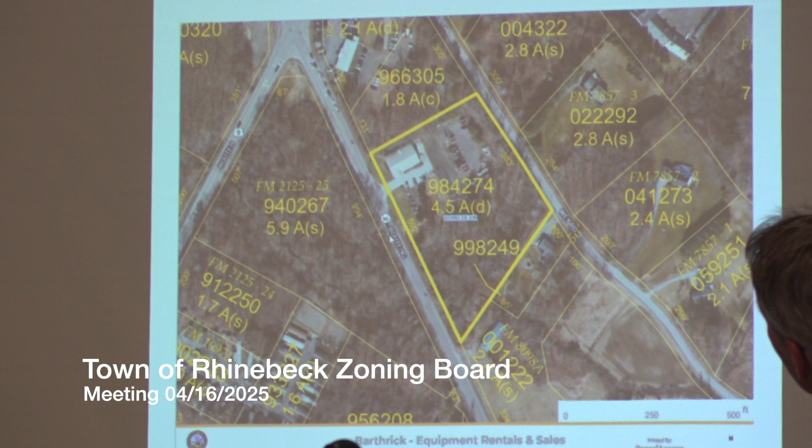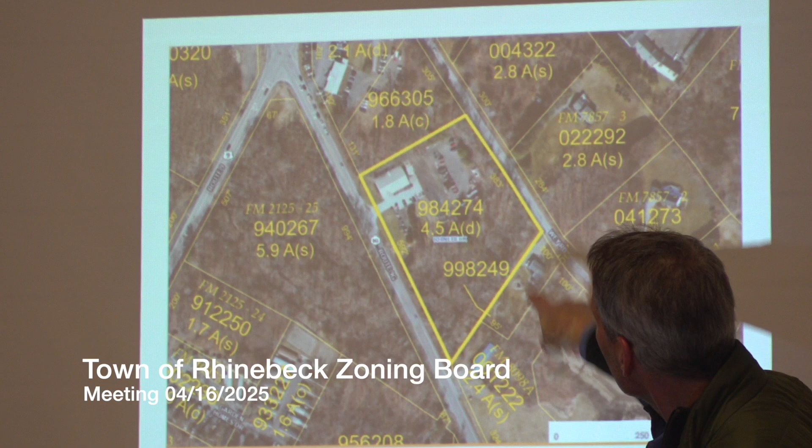I mean, yes, it is residential on this side of Wey Road, but there's a road between there and then the house is set back. Am I seeing that correctly? Yeah, there's a house, the big house, the log cabin structure, like up here, and that's residential. But it just seemed like it was adjacent to more commercial properties. But I mean, technically, it is across the road from these residences.

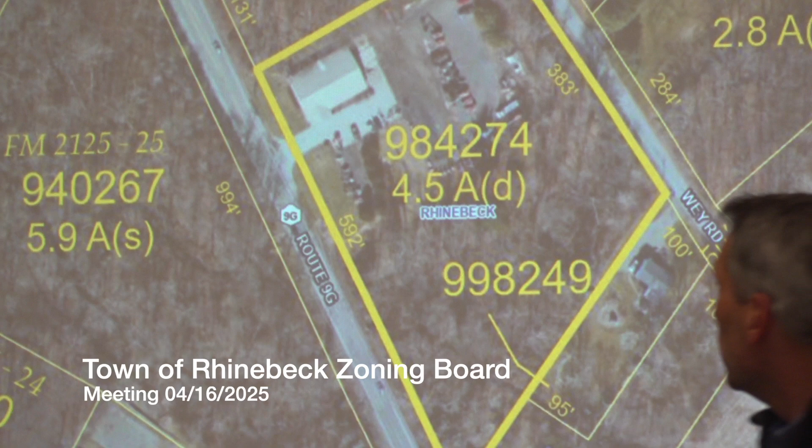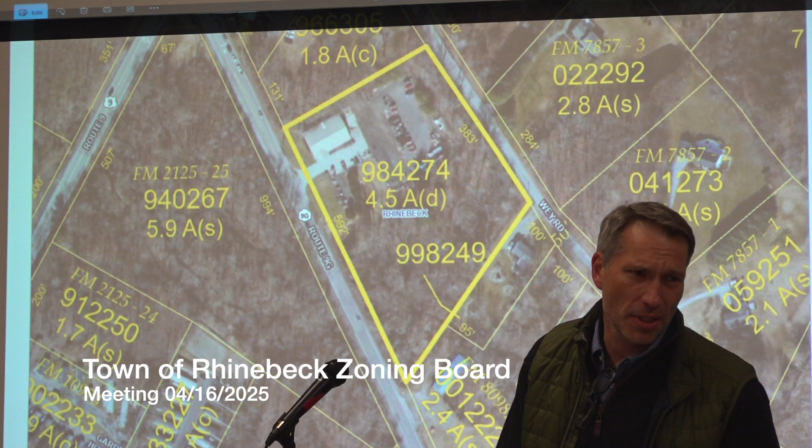So it's that's what I probably say - just on the border, it's the last residential property, and then I guess it's a commercial use that was built out on it. Maybe, I don't know, do you remember when the structure was put up? It had to be - well, we purchased in '04. Okay, but it was pre-existing.

The problem is with a use variance, they're very, very difficult to get. Extremely difficult. It's not like the area variance, which is a much easier thing to do. So this is kind of the plain Jane situation, we see the same thing, we need a bigger sign, yes you do.

We've given those variances to many folks along that corridor, so that wasn't a big deal. It was the fact that unfortunately it's a residential area, and I thought there was only a certain type of lighting allowed. I talked to Brian today, and he said his determination is that because it's a residential district, he reads the code as saying no illumination whatsoever.

So there's no flexibility, you need a use variance for that. That's the problem, the use variance is so difficult to get. With an area variance, there's a difference in the zoning law regarding physical dimensions, but if something's not allowed at all, that's when it becomes a use variance as opposed to an area variance.

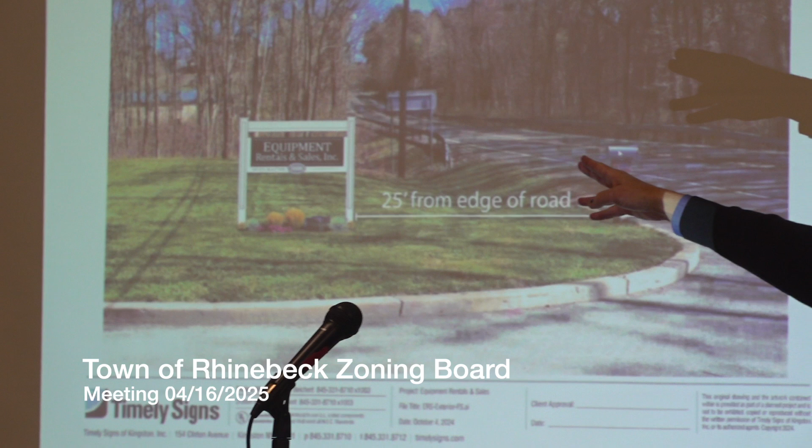I have another mock-up showing the sign on the site, right here. So this is the setback, 25 feet from the road. It's still below the tree line there, but it's got better views going south. We tried to move it up closer to the entrance to help people visually know where to turn in.

I'm sure there'll be some nice landscaping underneath, which is also a requirement. The renderings are nice, and that's usually a bugaboo, but that's exactly what we need. If we take the light fixture off, we have a 6-foot maximum height, so that would enable us to move the sign up, maybe just the caps could be 6 feet, a few inches lower than that. So it might help with the visibility even without the lighting. Then we can do the reflective paint too, it's a good suggestion, I hadn't thought about it.

So Kim, what are your thoughts, should we adjourn this to the next meeting, or do you want to accept it? I think we can accept it subject to the lighting question, you're going to check with your client. We can make a decision - if they decide to move forward with the lighting, we'll talk about a use variance, but if not, I don't think the plan's going to change much with or without the light. It'll actually look a little better if you take the light out, so I don't see an issue. I can have an answer for you probably tomorrow or Friday. That would be great.

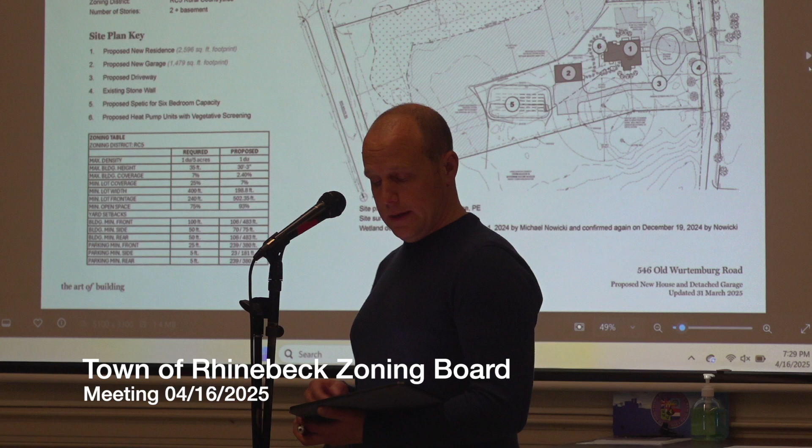But additionally, there's no existing or proposed driveway connection or approved break-in access point from 9G, which would require a permit, and we have no plan to do that. There's also an existing stone wall on Old Wurtemburg with an entrance already built into it, which we plan to use as our driveway entrance.

There's also a wetland that completely bisects the lot from north to south, really cutting off any access we could get from 9G, even if we were to propose that. That would require a specific permit, and also would not be advisable — we'd rather not build over a wetland to provide access when we have perfectly good access from Old Wurtemburg.

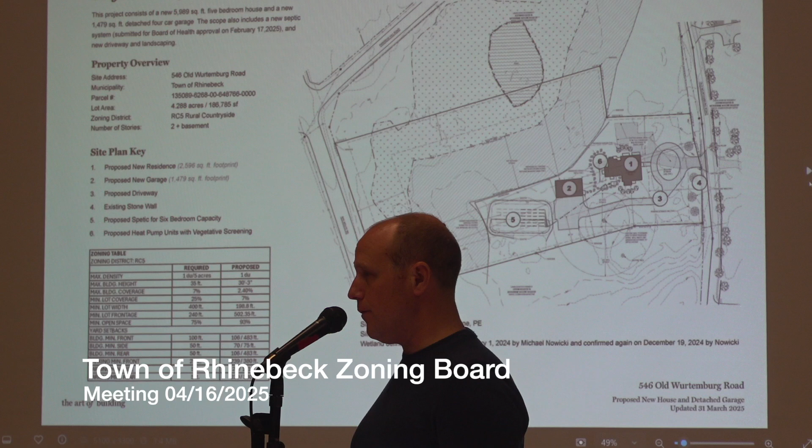The last item I want to bring up is again regarding the definition for fronting street, which there is none. Per code section 125-27 sub A sub 3, it states that except for agricultural structures, guest cottages, or caretakers' dwellings, no accessory structure shall project closer to the fronting street than the principal building, or be located within a required front yard.

Without a written definition for fronting street in the town's code, we would argue that in this case Old Wurtemburg would be the fronting street, and thus the proposed garage sits behind the new residence and adheres to all other zoning applicable. We'd also put forward that in any case of ambiguity in the code with no definition for fronting street, the burden should not necessarily lie on the owner to adhere to something not clearly defined, but rather fall back on the town to revise or clarify its code.

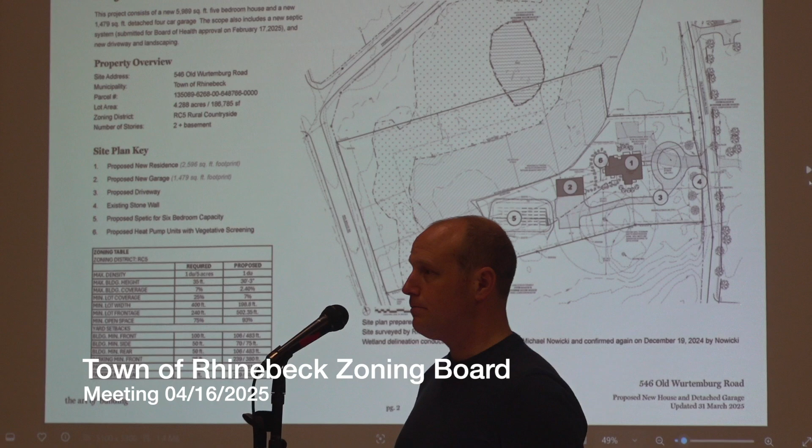Did you want to go through this briefly? I know you may have already mentioned it. Here's the pictures, and that shows what's important.

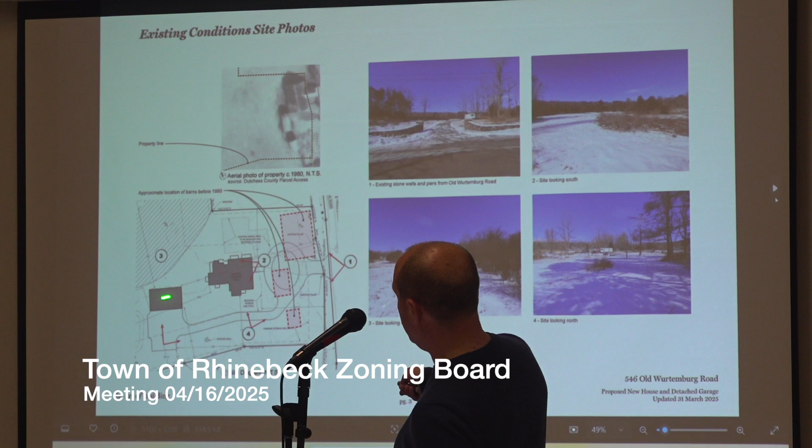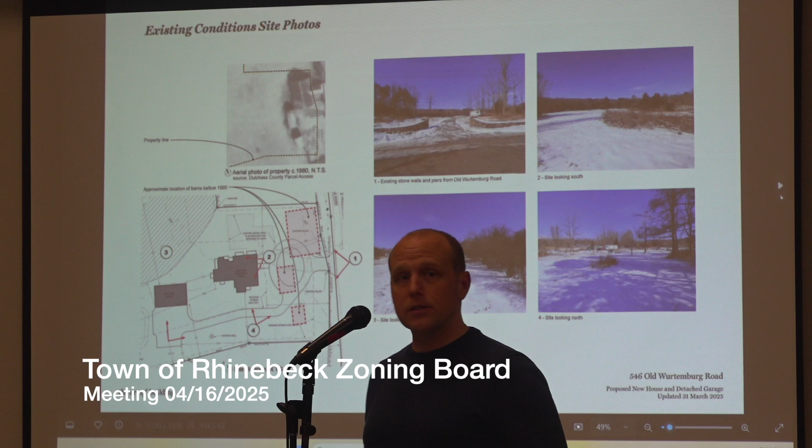Yes, so we were proposing a new single-family residence with its driveway entrance off of the existing stone wall, with driveway access to the back of the lot where the garage would be placed. We've placed the garage directly behind the house with its garage doors facing south, not addressing the street, making it clearly an accessory structure. The house faces east with its front door towards Old Wurtemburg. The dashed lines may not be relevant, but it's part of the old Marquardt farm, where some historic barns had originally been but were demolished long ago, sometime in the 80s.

As you can see, the break in the stone wall is where we propose our new driveway, which is where an existing opening already is.

Yeah, we actually passed by there, maybe January or February-ish. We were looking at a site farther down the street and happened to see that. Plus, you've been before us before for the other side of the street where you saved the barn and all that kind of stuff. You did a nice job there. The only thing I was going to ask, if this actually applied and we had to go forward, was...

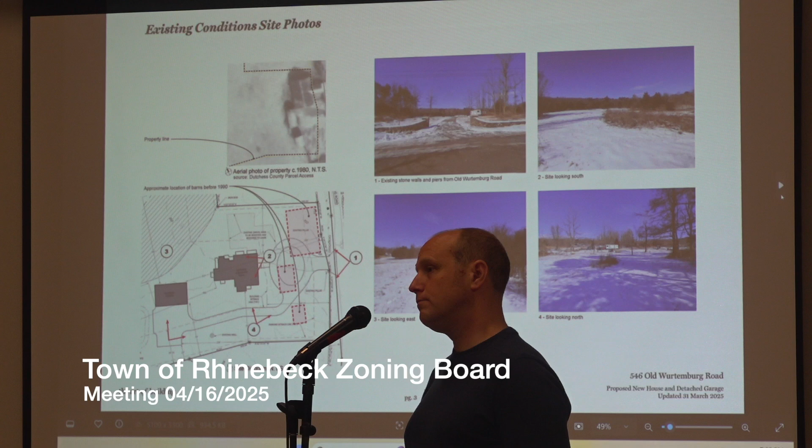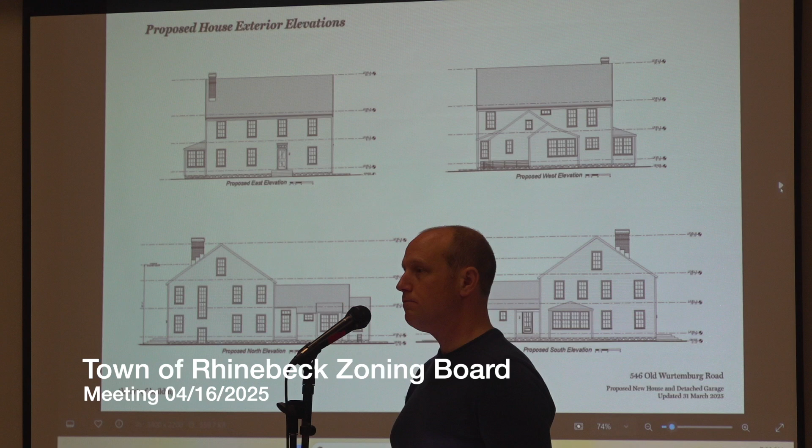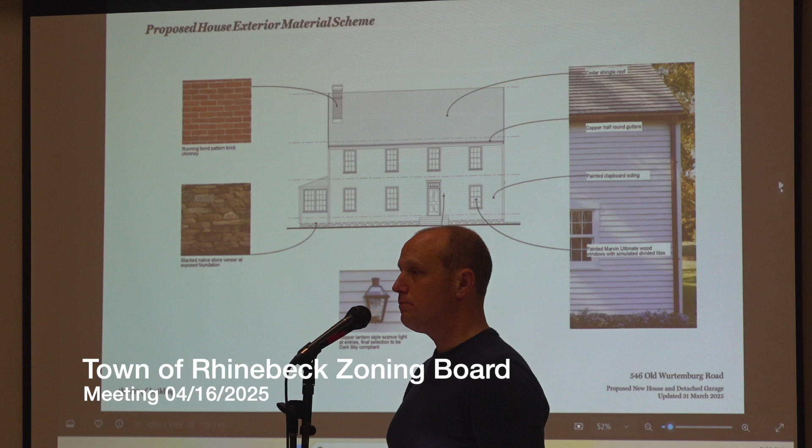To get renderings of the house and the other structures, in color, showing how they would appear on the property - their color, et cetera - situated as best you can. That's usually done pretty easily by folks in your profession, so it makes it a lot easier for us to see exactly what the structure is going to be and how it's going to sit on the property.

Absolutely. So I guess I would ask, if it's not too much trouble, to do that. I know we may or may not be going forward with a public hearing, because I think we need to get a determination on whether we need to go forward with this.

What would you want us to do? We may not be going forward because... well, no, I think we have to decide whether this even applies or not. So I guess, who would you want the determination from - Brian, or... well, you are the board, so you can make this determination.

I'd like to get more information from you - I know we just met yesterday. I can send you guys a memo. I think that's a good idea, sure, so we can decide amongst ourselves whether this even applies.

I don't understand - first, if you have two front yards, does that mean you don't have a backyard? Well, no, this has a front yard, definitely, and a backyard. So using my critical thinking skills, looking at that map, I don't see why we can't move forward on this.

Oh, we definitely can move forward. But is it necessary? Well, I think we have to do one of two things - either deal with the variance, assuming the section actually applies, or say the section doesn't apply and there's no need for it. So we're going to either grant or deny a variance, or do an interpretation, which I think, in my mind at least now, looks like an interpretation as to whether this even applies. Does that sound reasonable?

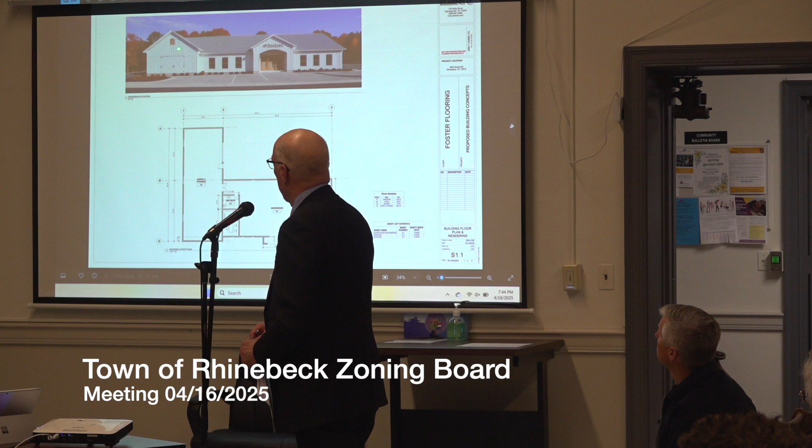We provided you with renderings of the building we're seeking to build there. That off to your left would be facing 9G. What you're looking at is facing route number... so this is the supply area, that's correct, it goes further out, and this is facing away from 9G. So the parking in the front would be for customers, and parking in the rear would be for employees.

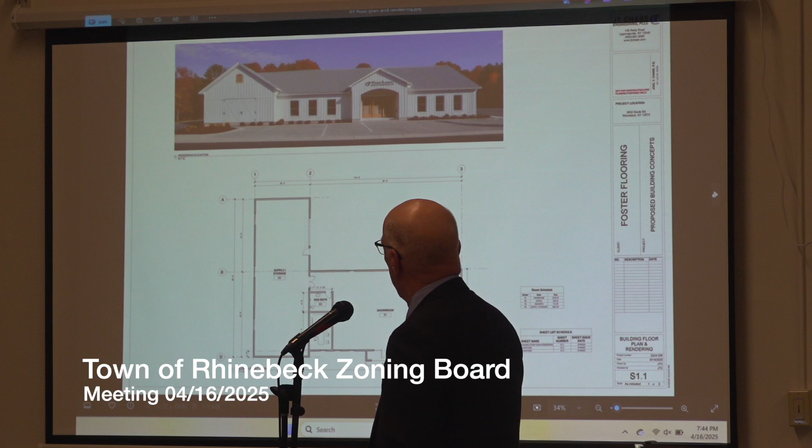Right now, in terms of the amount of people that go to the showroom, it's about 4 people a day - that's about the traffic level expected, four customers coming in per day. The people who install the flooring would also operate out of the building and park in the back. There's a separate parking area in the back.

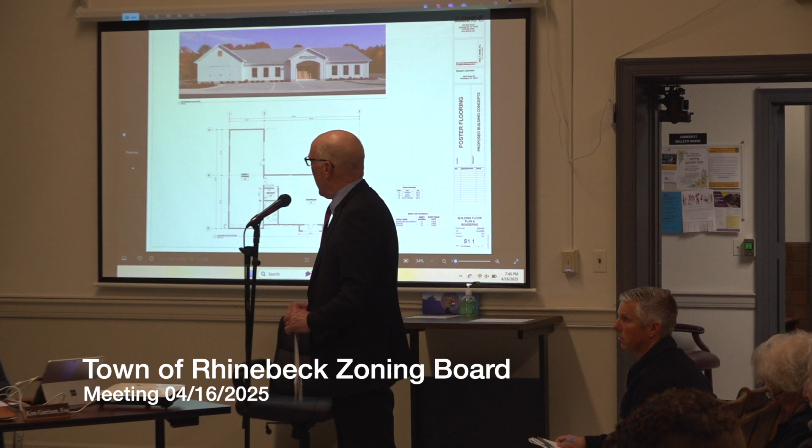So that's our application. The project engineer, Joel Chase, is with me here tonight, so if you have any technical questions, he's more able to answer them than I am. But that's generally what we're seeking to do.

I appreciate that rendering, but if it's possible, I'm sure it is, just have a rendering show the sides and the back, so we have the full picture. Sure. I think we all know the property well, but it's great to have the front - having the sides and back and how it appears on the site would be wonderful too, so we can get those renderings.

The only question I had was, does it have to be that close to the roadway? Is there a way to put it back or lessen the variance? Because one of the things we have to go through is whether there's a lesser variance we can grant to accomplish the same thing. It kind of looks from what we're looking at right now that maybe that's not possible, because a lot of times you do have things on site that preclude a lesser variance being granted.

So one of the constraints on the property is there are wetlands down towards Route 9 on that side, which limits how much you can move. So there's a small envelope that you can build in, maybe. Come on up, why don't you come up and introduce yourself? My name's Joel Chase, the project engineer.

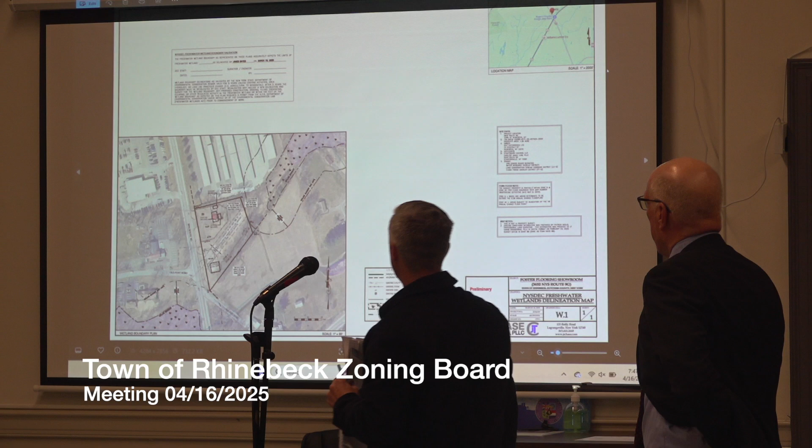We also have a utility easement that bisects the property, so we have to pick one side. And the northeastern part, we might have several feet of wetland adjacent area that we're ironing out with the DEC right now. That's what the questions were about, whether it's wetlands or maybe a septic issue. That's in the process of being revised right now too, because it's not validated or signed off by the DEC yet. That was based on discussion we had in the field. We're also trying to maintain the existing well.

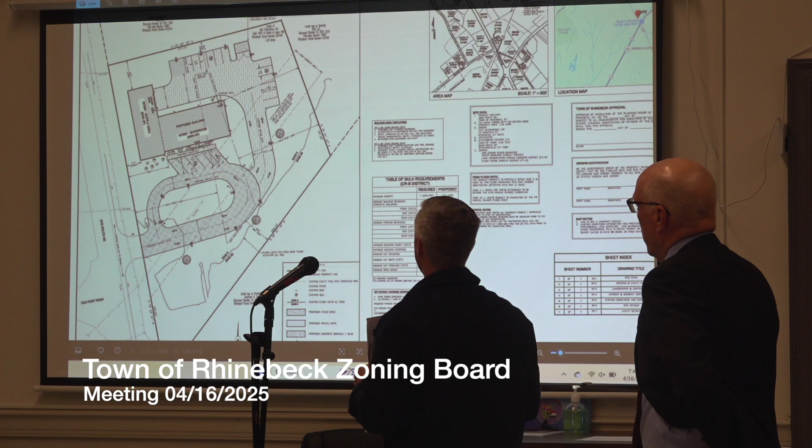If you see the site plan, the building envelope in general to where you would not need a variance is really tight. You can also see that it pretty much covers where the existing structures were on the property.

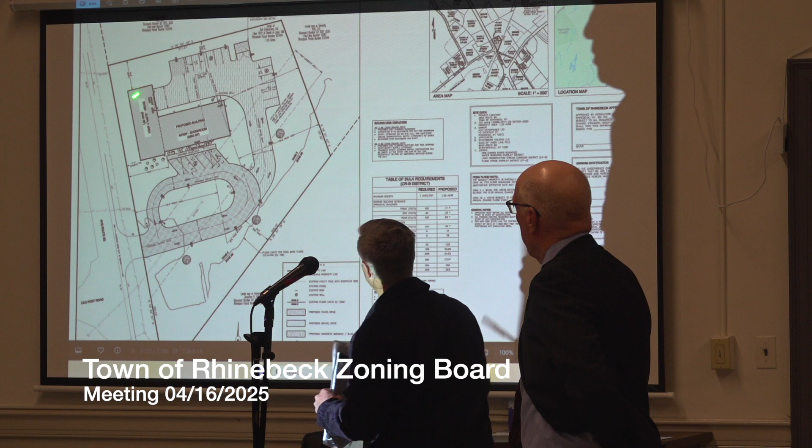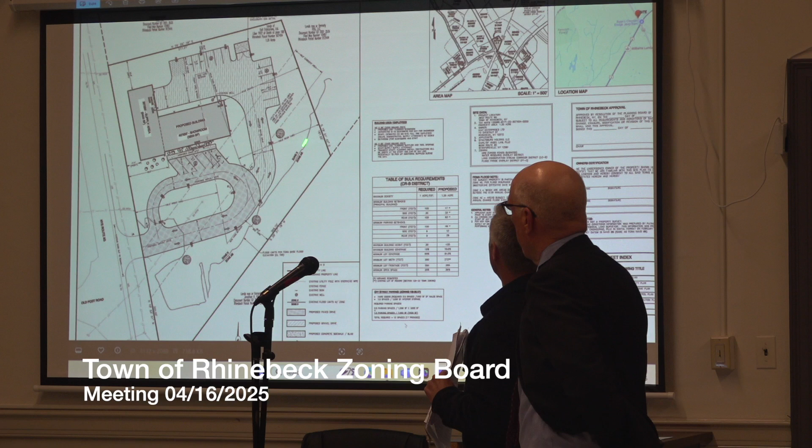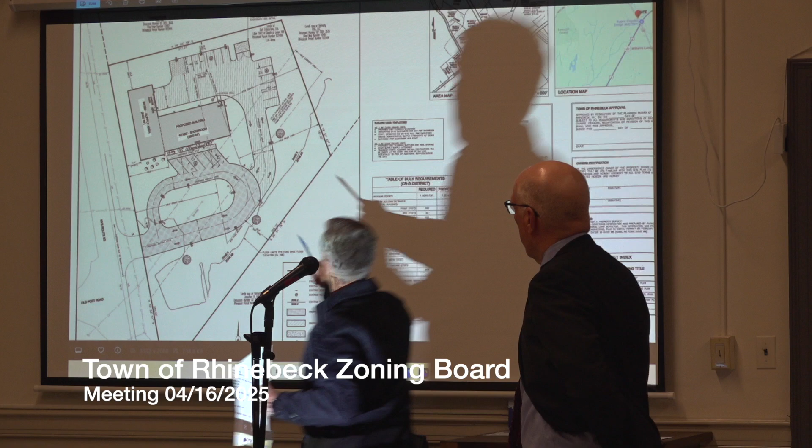This is the rear yard setback. Here's the front yard setback right here. And this is the rear yard setback, and here's your side yard setback. Where's the other yard setback? Up a little bit - oh I see, yeah, right at there.

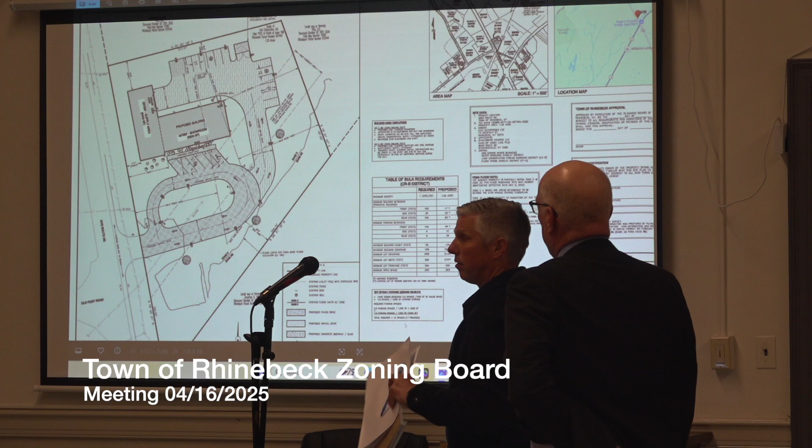Can you go back to the previous slide for one second, the wetlands one? I'm just trying to get oriented. There's the existing buildings over there, the existing well, and there's the foundation that remains right there - that slab was where the dry cleaning store used to be.

They had to take it down because it was in the floodplain. We have a floodplain running along there, and the wetland adjacent area might creep into there a little bit now. So that's where it has to be.

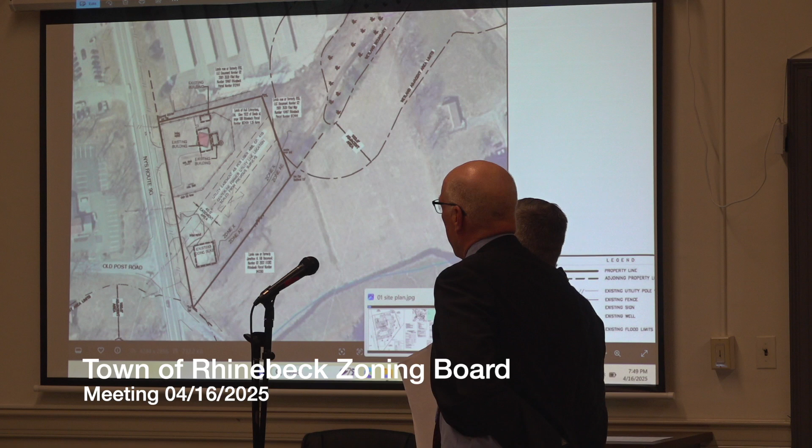I think the other thought is that it's a pretty nice use for that property at this point in time - it looks better than what's there. Yeah, I think that's the thought.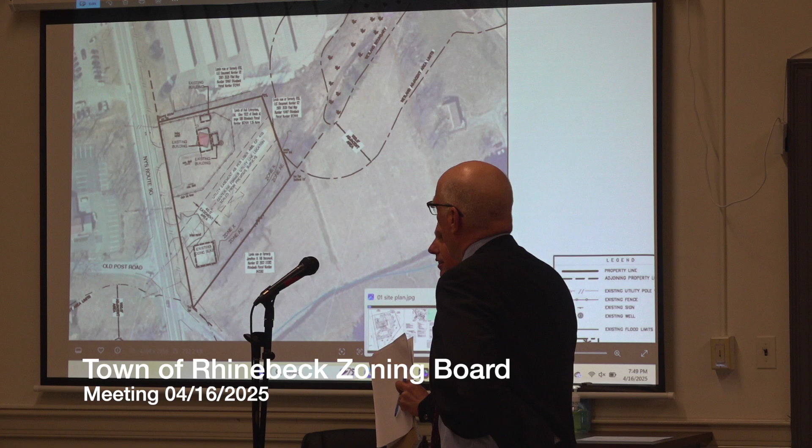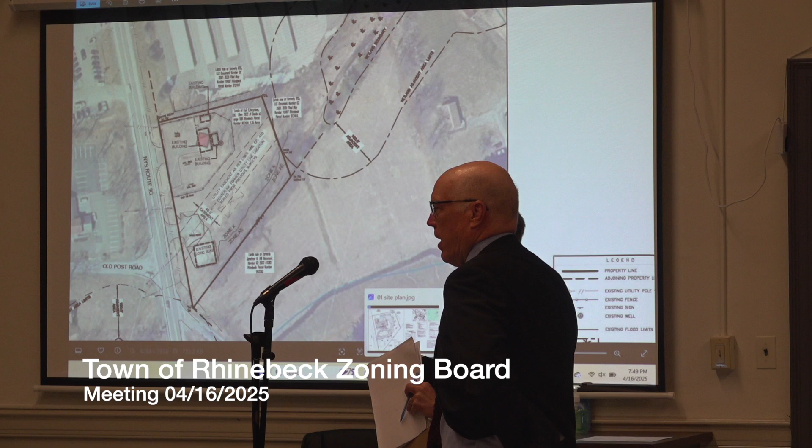What was that building that was there before? So the existing building you see there was, years ago, a place where they used to sell propane gas - up here. I believe that's who Mavericks bought the property from.

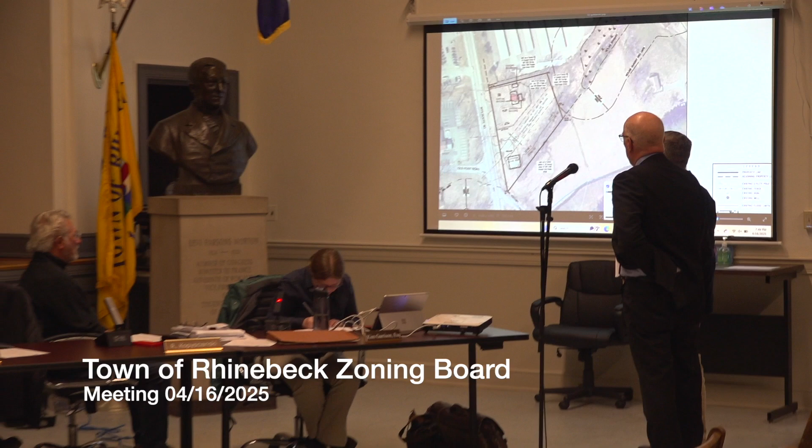There's no town water there? No, there's the existing well right there, and the existing septic absorption area was someplace else. So is the gas station on the well, and the pizza place across the way too? I believe most things around here are private water and sewer - this building might have its own private water supply.

Well, we can definitely get you those new renderings. The renderings are really the only thing I need, just to give a kind of panoramic view and see how it's set on the property. Absolutely - obviously we need everything staked out when we go out to do a site inspection, typically after the public hearing, so if there are any comments from the public we have them in mind when we go out to look at the site.

And the renderings before the public hearing - you had mentioned in your application that it's on the existing footprint of what used to be there? Well, it's similar, you can see where it is. There's a demolition site plan too that shows it. Actually, one of the building structures is right on the property line - existing. There's kind of a concrete slab, and then there's another slab over here.

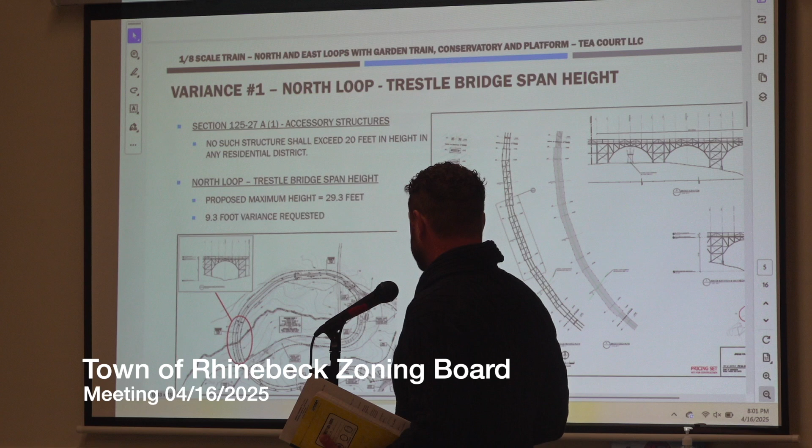So variance 1 for the accessory structures, section 125-27 A (1): accessory structures, no structure shall exceed 20 feet in height. We have a really unique circumstance here in that these were defined as structures. They are trusses, not livable structures of any kind. They are just wooden or steel structures.

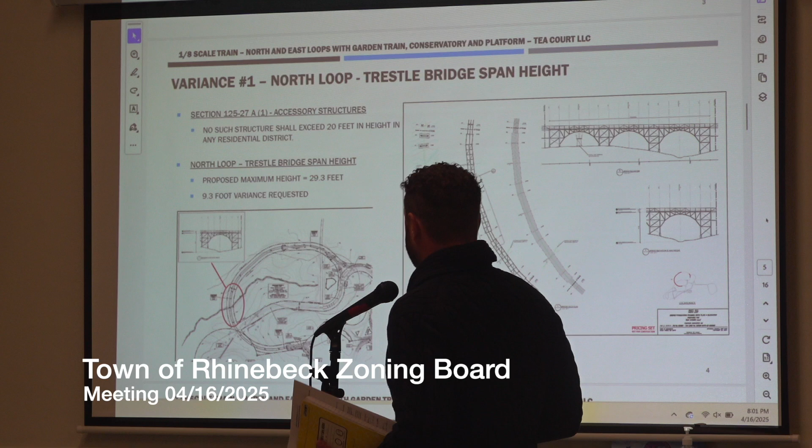So the proposed trestle bridge span height in this location for the North Loop is 29.3 feet, which is a 9.3 foot variance. That's up to just the deck. The railings were not included in that height, similar to the evaluation of some of the other structures.

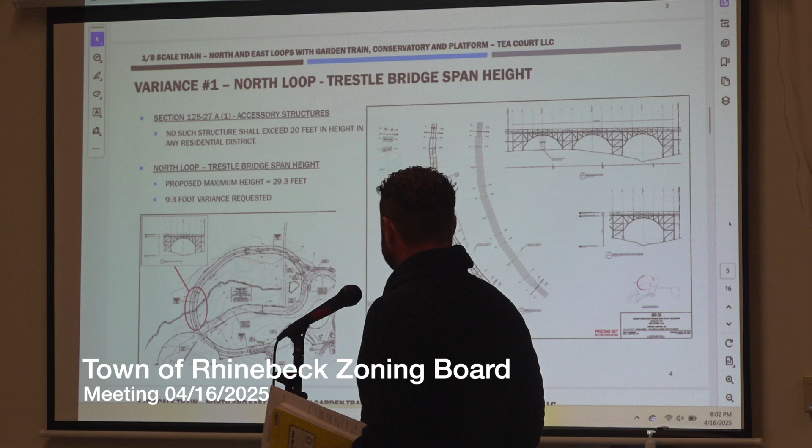The second variance is for the East Loop signature bridge. The truss is located spanning across a ravine, intentionally designed so that we don't impact that ravine, which is also somewhat of a wetland. We are doing our jurisdictional determinations as well. That span, at its highest point, is 51.6 feet, so the variance request is for 31.6 feet.

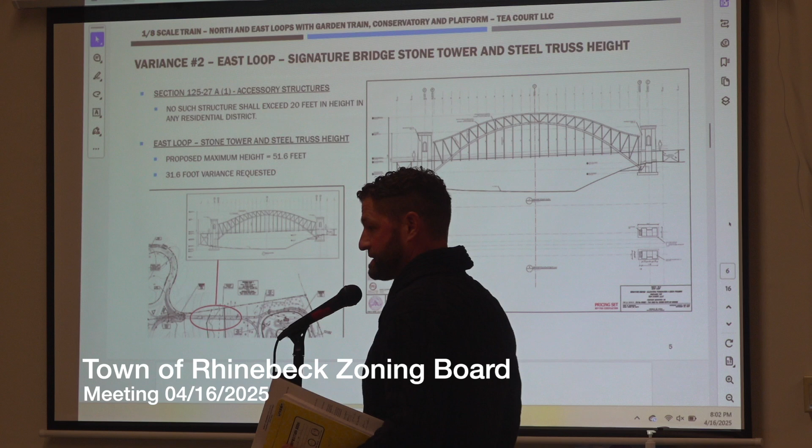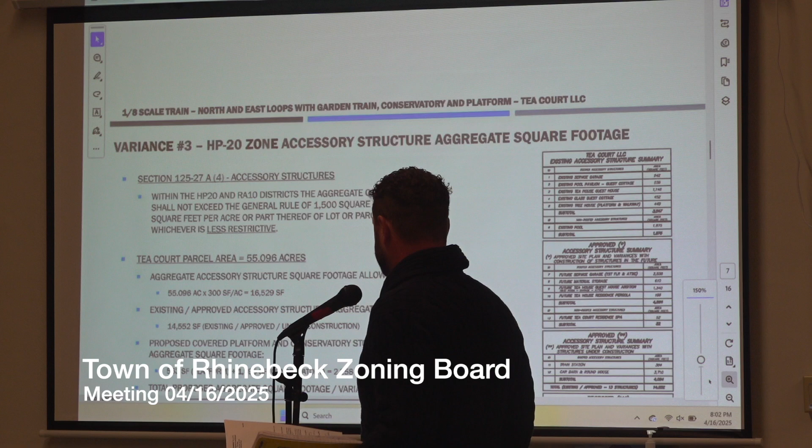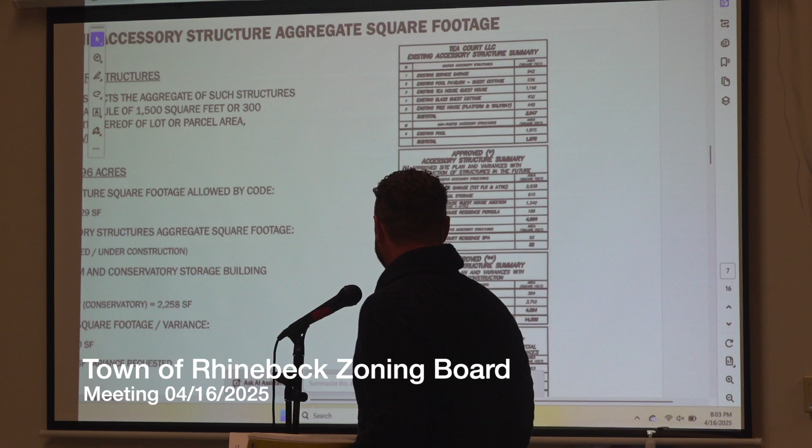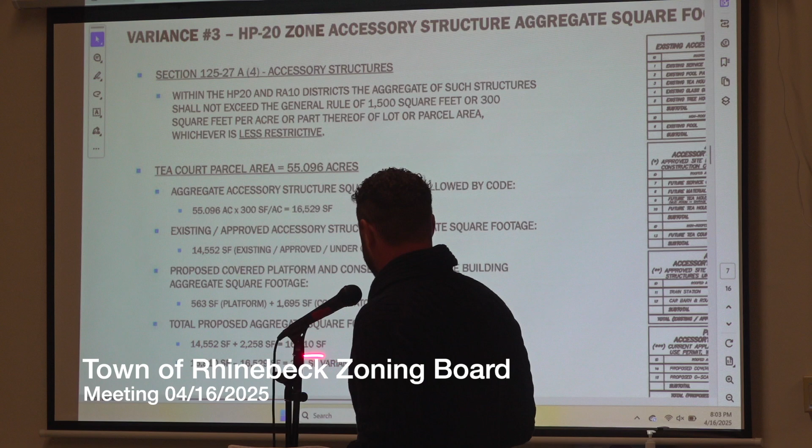On the Tea Court parcel, we have existing approved accessory structures that total 14,552 square feet, with no change to that. The change required here is to the platform, which is now 563 square feet, the new request. It went up by 79 square feet, which increased the total by 79 square feet, and also the variance. So 281 square feet is now the requested variance for total aggregate square footage of accessory structures.

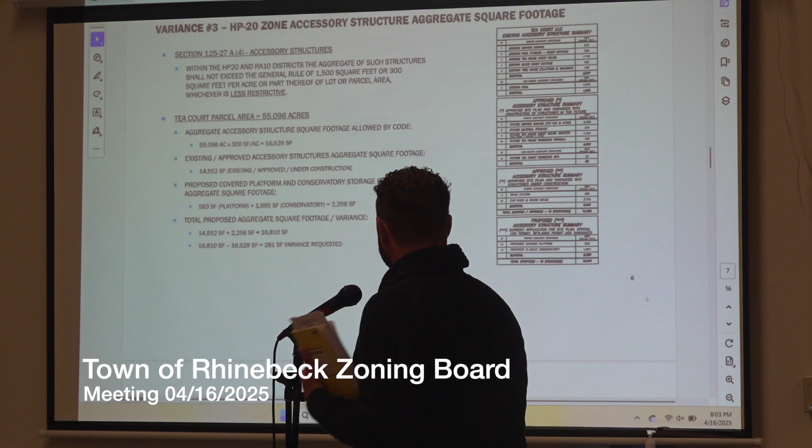Variances number 4 and 5 are about the unique placement of the lot. On this site, the principal structure is actually located on the Hudson River just by Astor Cove, all the way at the rear of the property. The property is an irregular shape.

The two structures that are proposed are located here, the platform and the conservatory. Obviously, there's a large distance between where the existing principal dwelling is, and our proposed accessory structures are closer than the principal dwelling to the fronting street, which is River Road. That's why we meet and are required to have these variances.

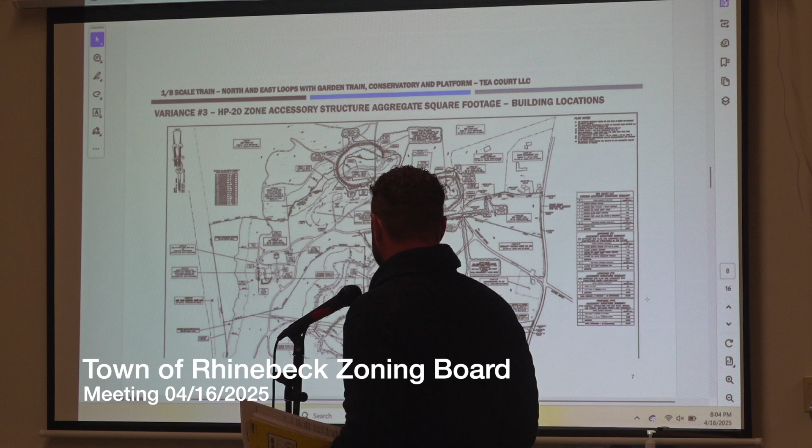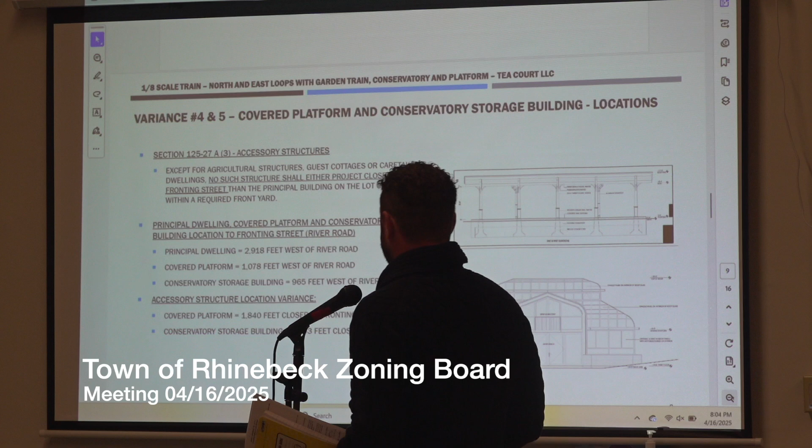The total distance of the principal dwelling from River Road is 2,918 feet. The covered platform is at 1,078, and the conservatory is at 965. Each one will require a certain variance over the distance between the principal dwelling—1,840 feet for the platform, as well as 1,953 feet for the conservatory building. Those are the variances before the board.

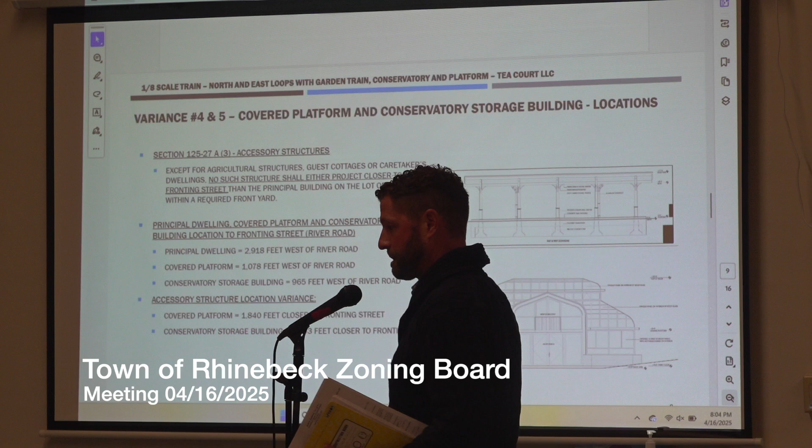If you could refresh my recollection, the last two structures—were they in existence 75 or 100 years ago, or whenever it was when this train system was first put in place? And are they in generally the same spot?

No, these structures were not in existence. There was a train station building. That actual train station building, an original Astor structure, is now located on SS Farm, the neighbor to the north. There have been some attempts made to possibly obtain that, but that has not been possible. These structures are in support of the ride-on train, which will be an arrival platform to a garden train area with storage for the garden trains themselves, which is the purpose of the conservatory structure. It is also to view the garden landscape.

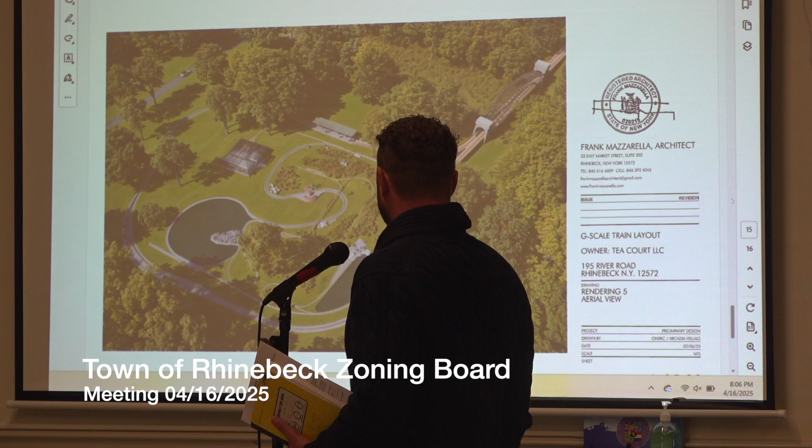This would be a finished existing trestle structure, very similar to the ones that will be on the North Loop as well.

And look forward to taking everyone out to the site, which I assume maybe we'll schedule this evening, based on your earlier conversation. But maybe we'll delay that till after the next public hearing to the planning board.

Yeah, thank you for taking us through that. It's a neat project. This matter was referred to the planning board, as all of the applications are, and we received something in the last day or so. I'll send this to you, Seth. It just says basically, given the nature of the project, we hold the public hearing open just to give them more time to assess it.

Okay, which is fine, and in the meantime, we can come out and do a site inspection. I always tell people we need to have everything staked out, but we'll have a pretty good idea of where the railroad tracks are going to be, where the conservatory is going to be, where all the various structures will be staked in the field.

Yeah, that's perfect. So the old railroad bed, this is actually a portion of Brindle Brook property, which Mrs. Koff actually used to own. And the old railroad bed actually goes through this area here. The distance here is about 2,000 feet, so I'm going to guess that this distance here is also over 1,000 feet. In between that area you have not only topography and hills, but I wanted to point out that it actually rises up to the entrance road that goes to Tea House. This is almost along a ridge line.

Most of this drops down into what is the meadow of Astor Courts and all of the fronting of that property. It drops down towards Ferncliff in this direction. And on the back side of this, it actually drops the other direction down towards SSS Farm. So there's quite a high point here in this area, and there will most likely not be visibility of either Phase 3 or the signature bridge from that point.

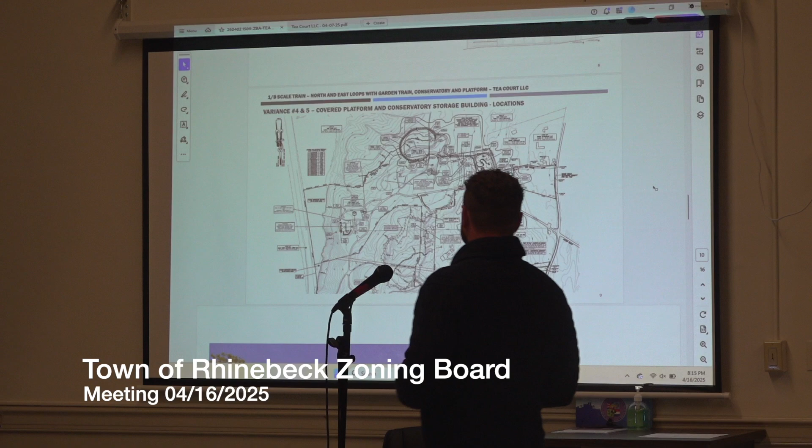Thank you. Do you have any other questions or concerns? I apologize, I just didn't think there was somebody here, I usually ask. I didn't come for the fun of it. Well, this isn't so bad.

What's the structure made of, is it concrete or composite? How's it gonna physically hold up, the structures themselves? Just curious how it's gonna hold up.

We're looking at both composite materials and, due to conditions here, methods of potentially removing the structures and storing them. That's also another reason to have the conservatory, so that during winter months or the months where weathering might occur, we would be able to dismantle them and place them inside. But we're definitely looking at materials that will hold up to weather here, both sun impacts and our local weather.

He's from Chicago, by the way. You broadcast that. We could go back to the view of Chicago and build, I don't want to make him homesick. So, all right, I don't have any other questions.

Board members, any questions, concerns? Anything else? All right, again usually I would close the public hearing at this time, but we do have a request from the planning board to keep the public hearing open as they need time to review the plans and things like that.